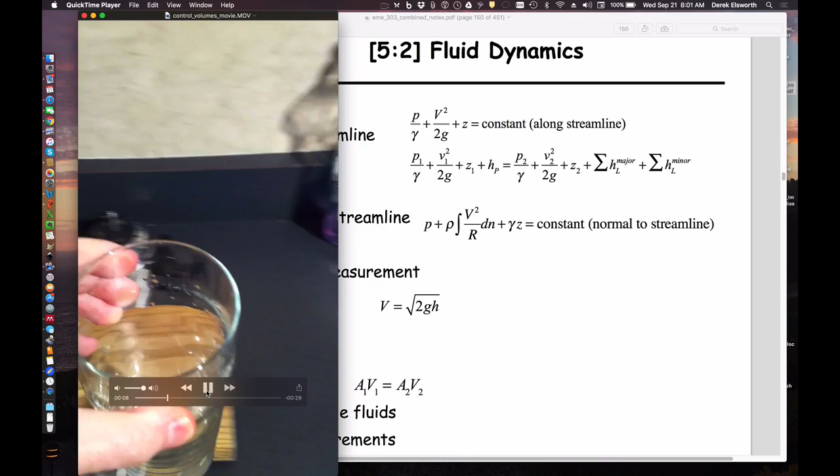So, anyway, that's all about Bernoulli. We'll also see this example in another circumstance. We'll use it when we talk about control volumes.

And again, you can see that this is kind of Bernoulli in action. I'll try and freeze it where I want to freeze it. Maybe it'll evolve. So obviously it's filling up the glass with water in this case.

But when we turn it on, if you look at this, it's an exposition of a couple of things in Bernoulli. One is that if we wanted to, we could write Bernoulli upstream and downstream. We could write the conditions that we know here, which we said last time would be fluid pressure, elevation, and velocity.

We'll have to talk about the exam later.

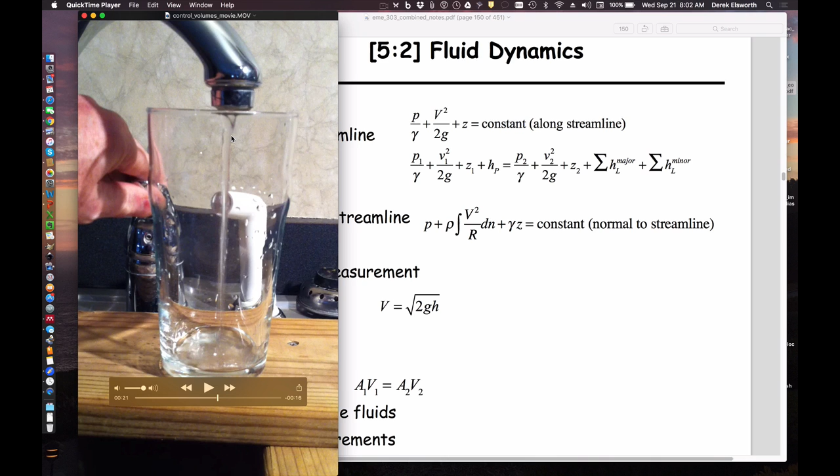And we could do the same at this lower portion. If we knew 3 of the conditions here and only 2 of the conditions here, such as pressure and elevation, we could calculate velocity. And if we wanted to deal with this, we could also apply this second requirement, which is in the background here.

Oops, wrong one. Which is in the background here. Let me find the right location. I didn't quite do that right, did I? Whoops.

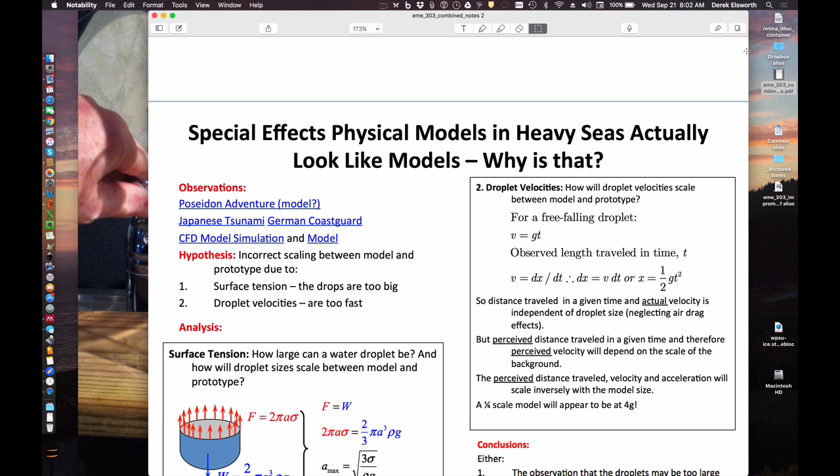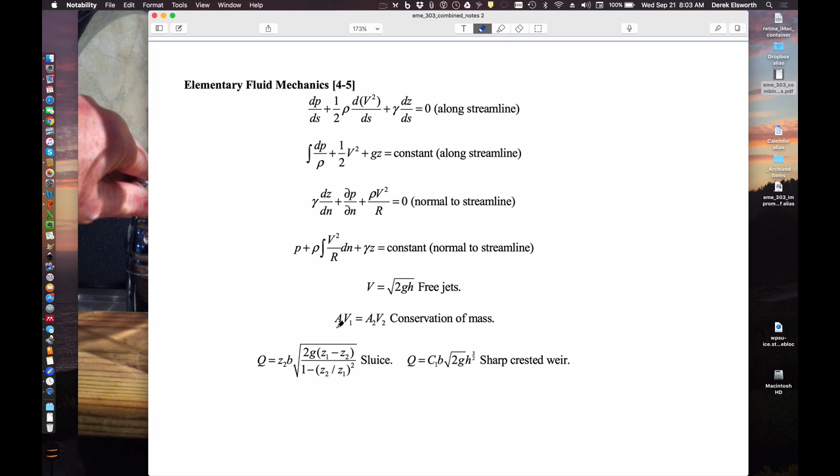And that is that we made the suggestion that when we use Bernoulli, what we can also do is apply this idea of conservation of mass, which is this term that we're dealing with here. And that is that the area times the velocity upstream and the area multiplied by the velocity downstream have to be equivalent to each other.

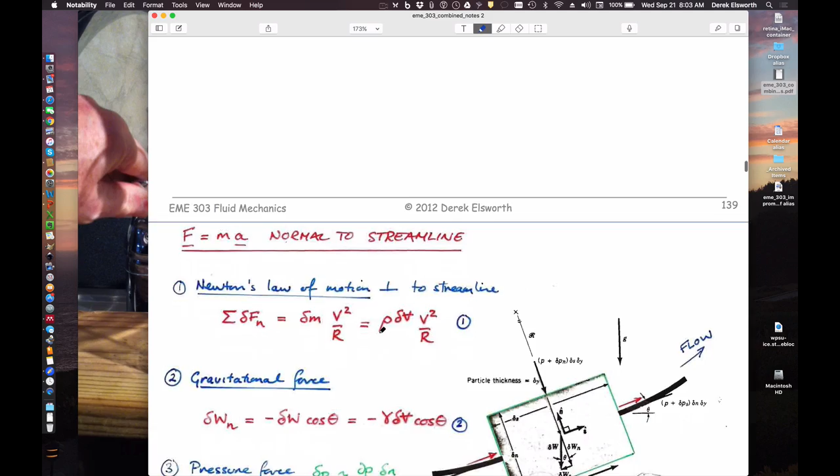And so I apologize for this, that we're going through this. I thought I'd set this up before, obviously I didn't. It's last time's.

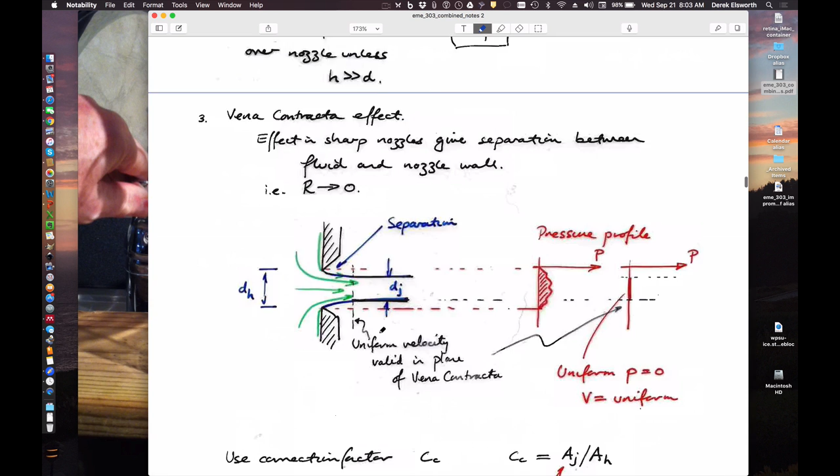This requirement here, you can see the exposition of it by looking at the cross-sectional areas here. You know that the velocity at the top has to be smaller than at the bottom. It could be 0 in the limit at the top, but because it's accelerating by gravity, it has to be faster at the bottom. And so if it's faster at the bottom, the velocities have to vary according to the ratio of the cross-sectional areas. We can see that exposed in this picture here.

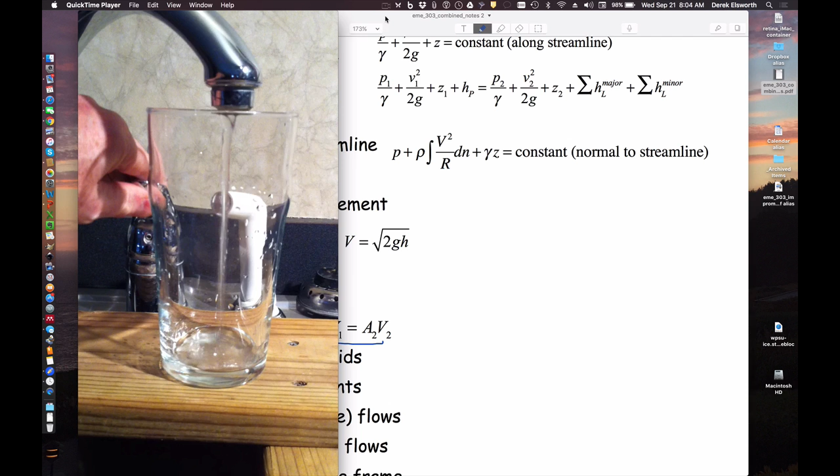And so that's what we'll talk about today, is we'll carry on dealing with Bernoulli, mainly along a streamline, and mainly applied to defining behaviors for a number of different examples, which we will attempt to look at. I'll go to this.

Okay, so to recap, most of our action is going to be on looking at Bernoulli along a streamline. If it's inviscid, then these terms all disappear to zero.

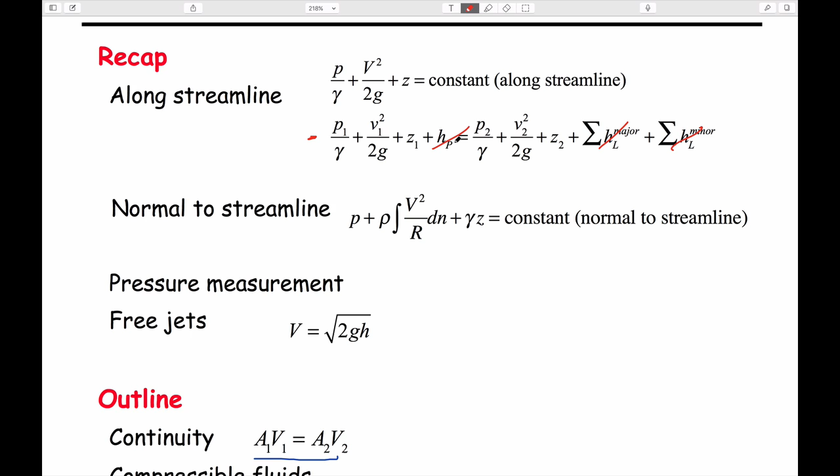And we're left with 6 terms. We can solve it with either one unknown or 2 unknowns. If we want to solve by 2 unknowns, then we have to invoke this to be able to solve it. We can also do it normal to a streamline.

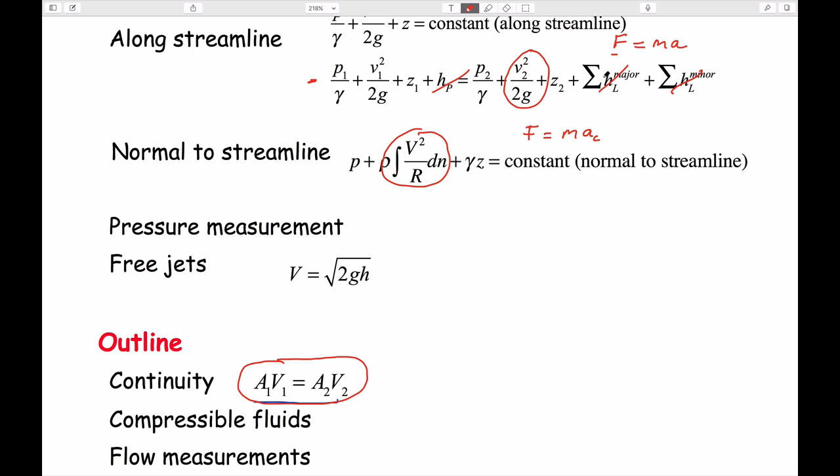Again, we have the same kinds of behavior in that if we look at this, it's not very well written for our uses, but we know that this is really an exposition of force equals mass times acceleration. This is the acceleration term. This is equal to force is equal to mass times angular centripetal acceleration. This is the acceleration term, and the other terms are those that relate to forces. And so they come from a common root, and really they are absolutely nothing different from looking at your dynamics class, your EMCH 212, that talks about motion of bodies governed by Newton's second law.

We did an example last time that looked at free jets, so we have a standard solution for that, which is this. And I was just going to spend some time looking at this example that we've just talked about now. And the example we talked about now could be the falls.

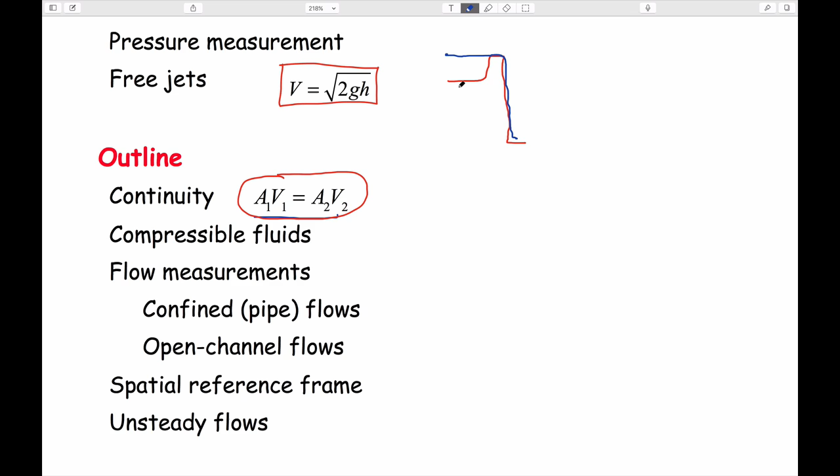And we can make the falls easy for ourselves by having a streamline that goes across here. You might have noticed in that movie that the kayak, as it's going down, look at it again, and you'll see that the kayak's going down at basically the same velocity as the droplets of water that are going down. They're in synchronization. And so it's really just an exposition of this F equals ma.

We could write the behavior of this between 2 locations, locations 1 and 2. We can make life easy for ourselves that instead of writing it here, where we would have some velocity that we'd have to include, we could use the big tank assumption and assume that the velocity is equal to 0 because the tank is large. And if that's the case, then we can write our expressions out as...

P1, pressure, head over unit weight, plus elevation, plus velocity squared term over 2g, is equal to the pressure at location 2, unit weight, plus z2, plus v2 squared over 2g.

And we could write this at 2 locations. We could write it where it's impacted the water at the bottom, at this point here, or we could write it at some location a small amount above that, and that would change the magnitude of our behavior.

If we do it at the bottom where the velocity is 0, v2 is 0, then pressure will be equal to a large number because we've absorbed the energy and the change of momentum of the water has converted into a pressure. Or if we take it just above the point where it impacts before it stagnates, the velocity will be its maximum because it's accelerating downwards, and the pressure will be 0 because it's acting against it.

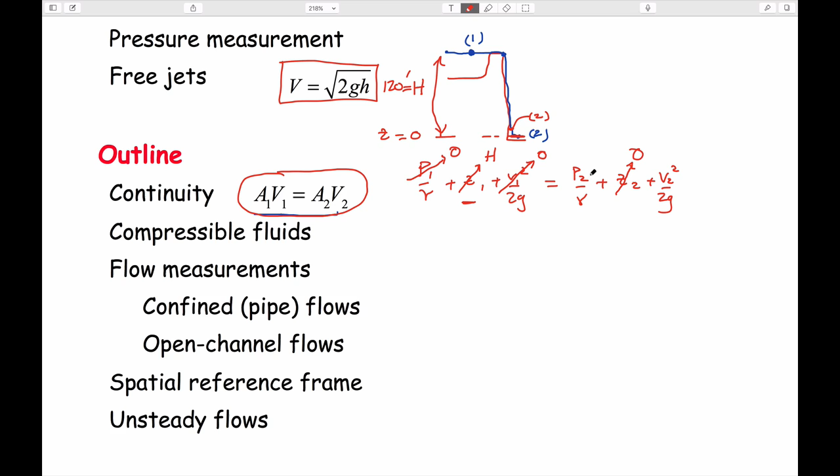If it's above the impact location where the velocity is finite, then pressure is equal to 0. So in this case, P is equal to 0. And in the lower case, V2 would be equal to 0.

And depending on what we want to calculate from it, then we choose either of those conditions. So I suppose in this case, if we wanted to calculate what the velocity is before it impacts, like in the free jet, then we choose this particular case. And we just get the fact that this would then be 0.

And so h is equal to v squared over 2g, v2 squared over 2g, which is the same as saying the velocity is equal to the square root of 2g times the height. So we would calculate the velocity of the water, same as the velocity of the kayaker at this particular location. And so we could do that quite straightforwardly.

The other thing we could do is imagine some falls that look different from the ones we have here. Instead of being vertically downwards, imagine the falls are a slope that comes down at some angle theta. We can do the same analysis again.

We can talk about a streamline, using the big tank assumption, and choose a location. Let's call it point 2, just to be consistent, before it impacts something. This is the case where the pressure is equal to 0.

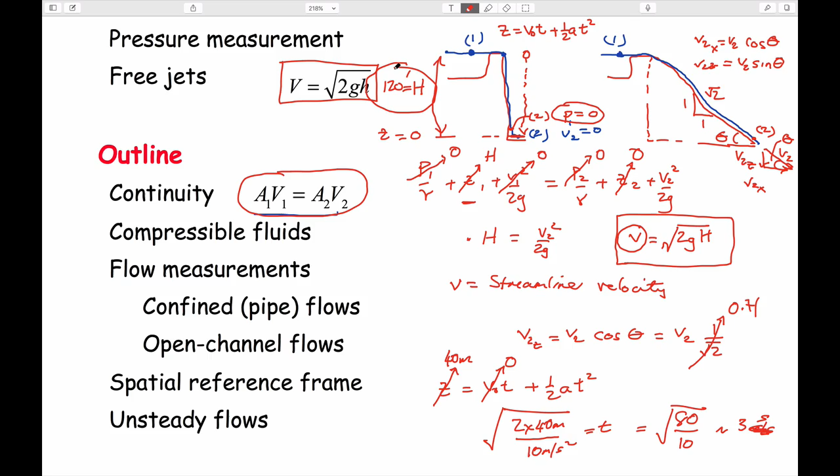So we know that when it's hitting at about 3 seconds, and if you remember in the dialogue or narration that came with it, about 3 seconds to hit the bottom, exactly the same. And you could calculate that from looking at Bernoulli's expression as well. So the point is we're really just dealing with bodies that happen to be in motion, which we can think of as individual particles of fluid, and they conform to F equals ma in all cases.

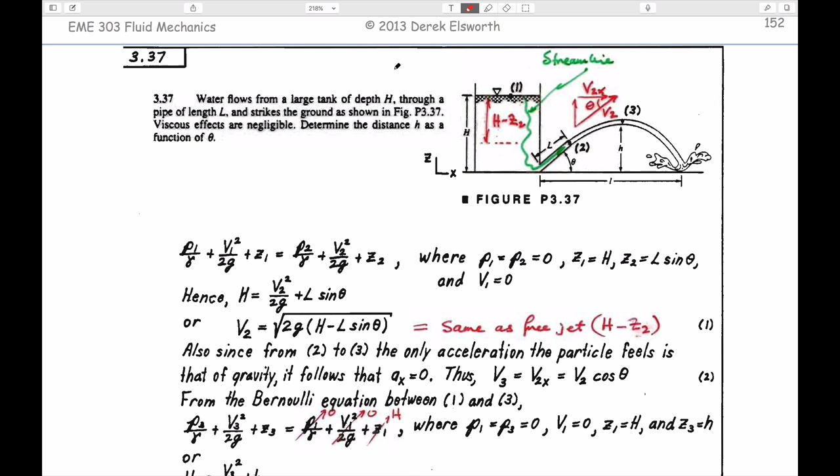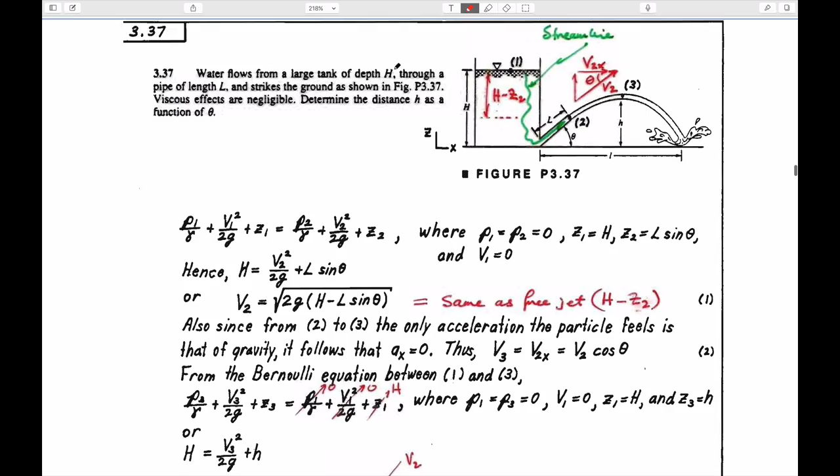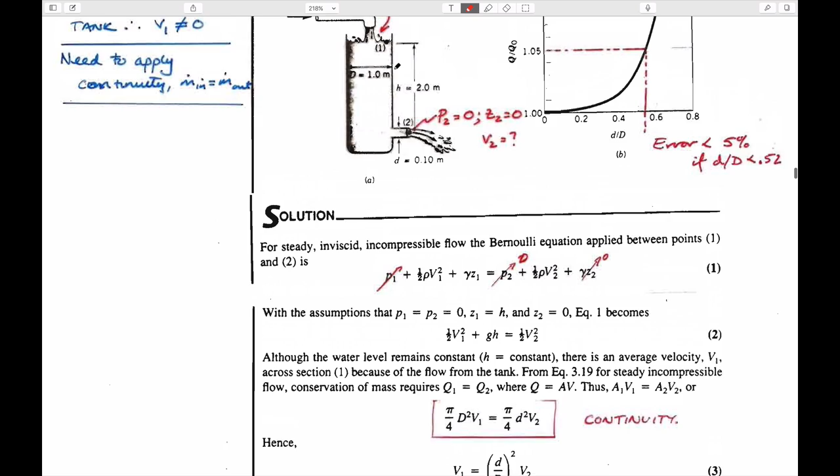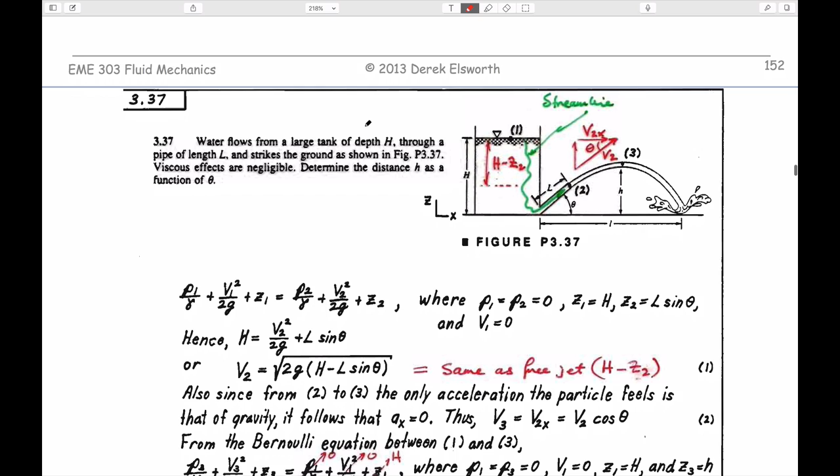So I plan to go through some examples just to make the point of how to solve these. There are 3 or 4 examples: one about fluids coming out of a tank, one about fluids hitting each other which we've already talked about, one about gas coming out of a closed container, and one where we don't necessarily require that the top surface velocity is equal to 0. So I thought we'd go through those and talk in general terms about how we might solve them.

So the idea here is that you have a tank, made a bit more overly complicated than it needs to be. You have a tank filled with water, with an outlet at the bottom that has a hose oriented at an angle theta up from the horizontal. The question is how high is the arc that develops as it flies out of here, and also how long is the arc as it goes from this location to where it comes down.

So how might we do that? We know we can write our conditions at a couple of locations. If we want to look at a streamline going through this green line, which is now a red line, it comes through here, we could write the behavior at this point.

Before we do that, let's back off. What happens if we had a hole in this tank here and a tube coming up to this level, open at the top? We know from fluid statics that the water elevation in this tube should rise to this point here.

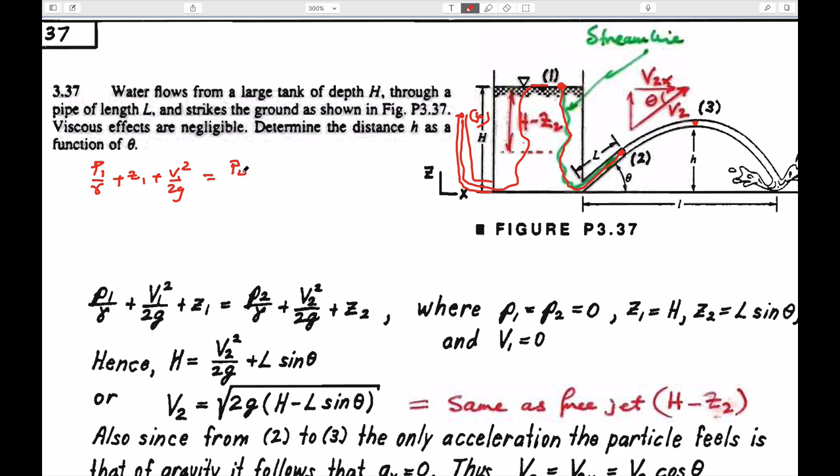If we wrote Bernoulli in terms of this, P4 over... well, let's not do that. We've said we always want to do it as a system from upstream to downstream. So upstream to downstream would be: P1 over unit weight plus Z1 plus V1 squared over 2g, and that has to be equal to the behavior here, which is the pressure at point 4, the elevation at point 4, and the velocity at point 4.

At the top of the tank, pressure is 0. Elevation of the top of the tank, if we take this as 0 here, then this would be uppercase H. The velocity at the top of the tank, by the big tank assumption, is 0. Pressure at point 4 is emanating into the atmosphere, and by the arguments from last time, horizontal pressure has to be 0, so the pressure at this point has to be 0 also, taking atmospheric pressure as 0. The elevation of this point, well this point here is equal to z by definition, so if z equals 0 is our datum, then plus z is this point here.

And this is what we don't know. So what we can do is rearrange this. The only terms we have are h minus z equals v4 squared over 2g. Rearranging that, we end up with velocity equals the square root of 2g times height minus the height of the tank minus the elevation of the point. So it's just a modification of our equation for a free jet.

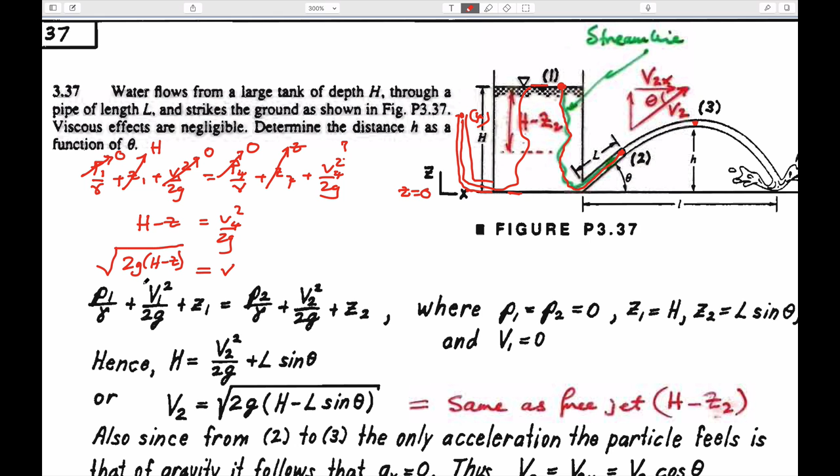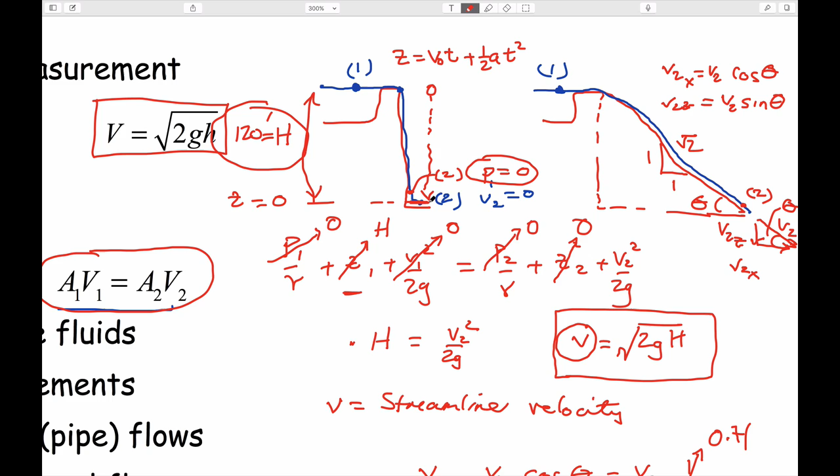In the same way that we did the example with flow going down this inclined plane, it's the streamline velocity we get. It doesn't matter if we're looking downwards or if it's deflected upwards, it's the direction in the streamline. In this particular case, the velocity along the streamline you'd expect would be vertically upwards.

If you move this tube up to this point here as we did before, the heads are equal to each other, and the velocity should be 0. Kind of makes sense from what we said.

But if the tube doesn't come up here and it squirts up to this point, just like the syringe example, then it should be at the top of its arc, and the velocity is also 0. When you think about this squirting out, really what we're doing is exchanging energy in different forms. Here we have potential energy. As we come down here it has kinetic energy, and it trades that kinetic energy as it goes up, again for potential energy at its highest location.

So we're just swapping between these forms of energy. This is kinetic energy, this is potential, and this is fluid pressure or strain energy within the system. We're just trading between those different components. That's how we can rationalize exactly what's going on here.

How do we figure out exactly what is happening at this point? First, we can solve this problem by writing this equation between points 1 and 2. That's exactly what you have here. We've already said what some of those values are.

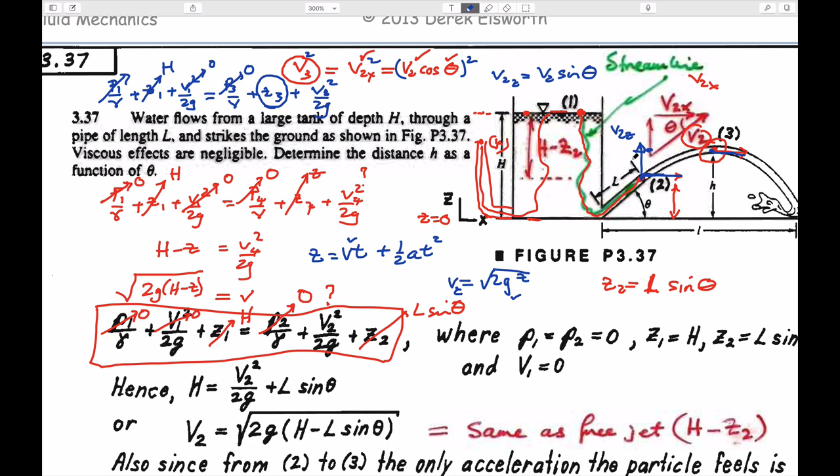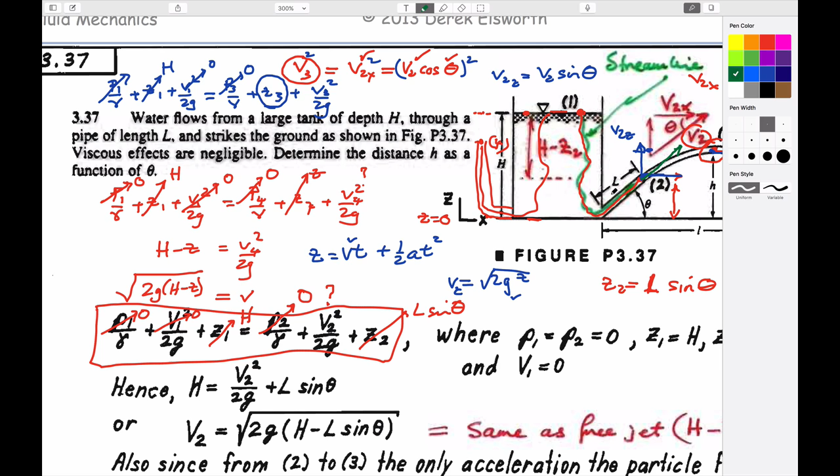It'll make a bit of a dog's breakfast out of that, but it'll be tangential to this arc, aligned, yeah, streamline. It's always a streamline velocity that we're dealing with. So it's made a bit more complicated by the fact that we have this tube coming out of it, but nonetheless, the key points are to be able to resolve directions.

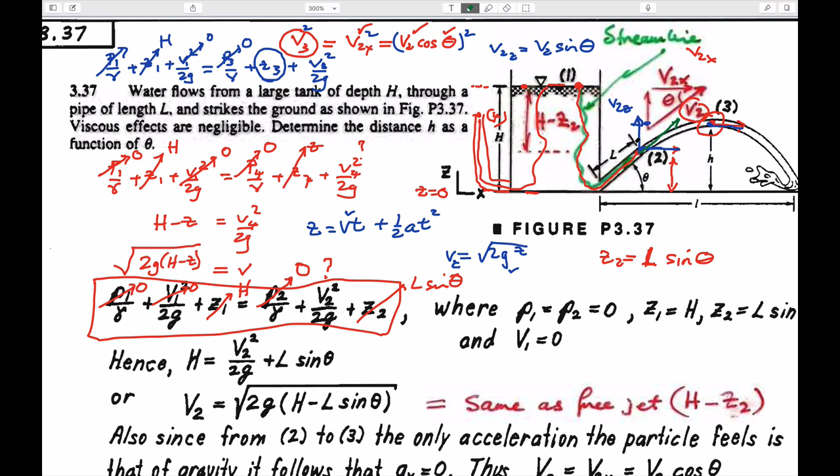Why did you say the pressure at point two is zero? Because it's coming out into the atmosphere. So the idea is that it's coming out of this. So the question is, why is the pressure zero, right? So you have a tube that looks like this.

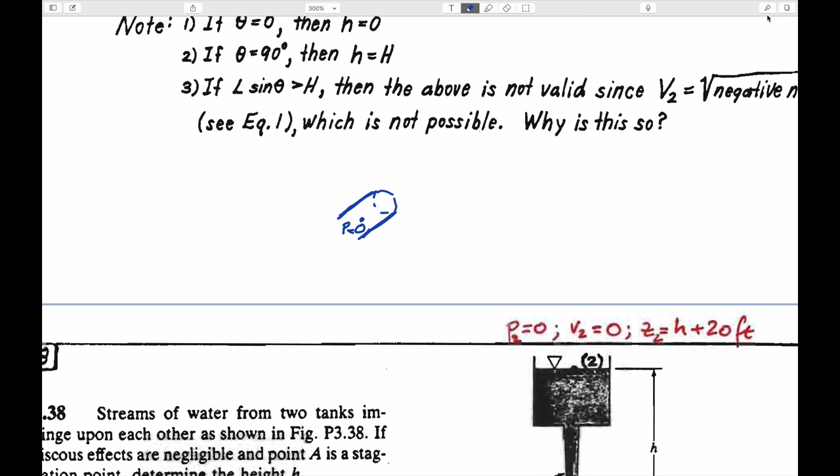And so clearly within here, the pressure is probably not zero because it's confined. But when it comes out as a jet into the air, then at this point here in the air it has to be atmospheric pressure. Atmospheric pressure has to act in the same direction in all directions. So this is P equals atmospheric. And so if it's acting at atmospheric pressure in this direction...

And it's also acting at atmospheric pressure in this direction, then for this to be continuous, if you do a free body diagram of a little packet of fluid, what's the pressure that has to be acting on a weightless fluid in this direction? It has to be zero. And so if the pressure in the center of this jet also has to be zero because it's acting against this sideways zero pressure, then it also has to be pressure zero in all directions. So that's the rationale.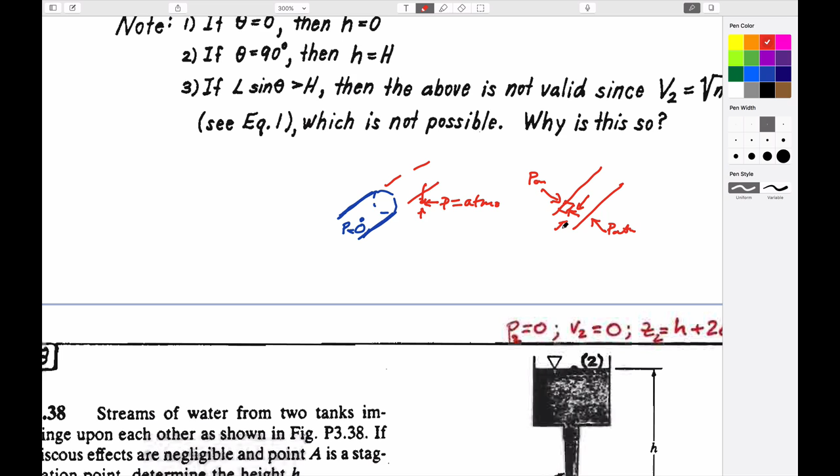And so it matters where you take this, because at this point it would not be equal to zero. And so I think germane to this discussion is this idea here, and that is that it really matters where you choose to take it.

We can take it before it impacts the pool at the bottom of the falls, in which case the pressure would be zero and the velocity would be non-zero. Or we can look at the stagnation point where the velocity is zero, and therefore the pressure probably is not zero. Because it's basically like imagine getting hit in the chest with a fire hose.

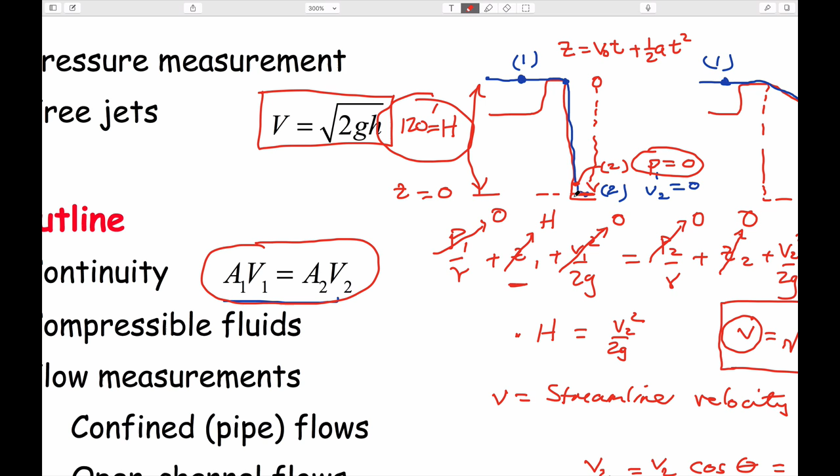Before it hits you in the chest, it really has zero pressure acting on it, because the fluid pressure acting in the atmosphere is zero on the side. But when you destroy the momentum of that, you feel it. So it's the destruction of momentum that we're feeling.

All right, second question, we'll go through.

So, two tanks. One tank, which is pressurized, has fluid squirting out of it, hits a jet that's coming from a second tank. They meet. The two jets, like two cars colliding. When two cars collide at 30 miles an hour, if they're the same mass, they stop dead, right? Because they exchange momentum completely. And so that's exactly what's happening here.

There's a streamline that's coming out of this jet here, which is ending up at point A. And there's a separate streamline which is coming from point 2 and ending up at A. There is not a streamline that comes out of 1 and ends up at 2, because it's not a streamline, right? One is coming down here and squirting sideways, and the other one is going up here and squirting sideways. So they're two separate systems. So you cannot write Bernoulli's equation between 1 and 2.

But you can write it between points 1 and A. So P1 over gamma plus Z1 plus V1 squared over 2G is equal to PA over unit weight plus ZA plus VA squared over 2G.

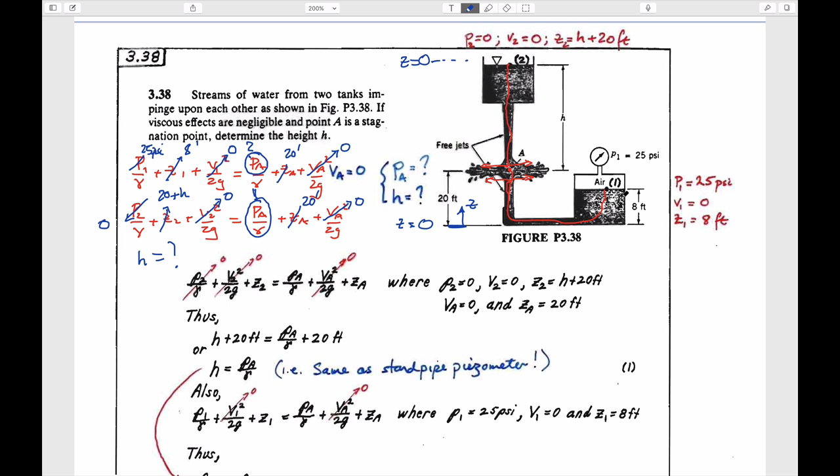Always choose a datum. Our z is always vertically upwards, positive upwards. And it doesn't matter where we took the datum. If we chose our datum to be z equals 0 here, then this would just be minus h. This would be minus h plus 20. And this would be minus h minus 20 plus 8. So just do your accounting.

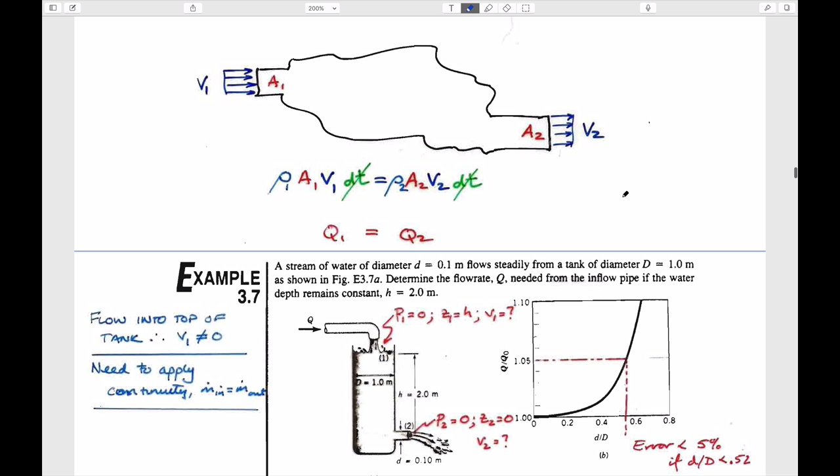Yeah, and there's some comments in there as well. We've talked about this, about the fact that if we use Bernoulli's equation, sometimes we only have 4 known variables out of the 6, and we need to make some assumptions to be able to close the system.

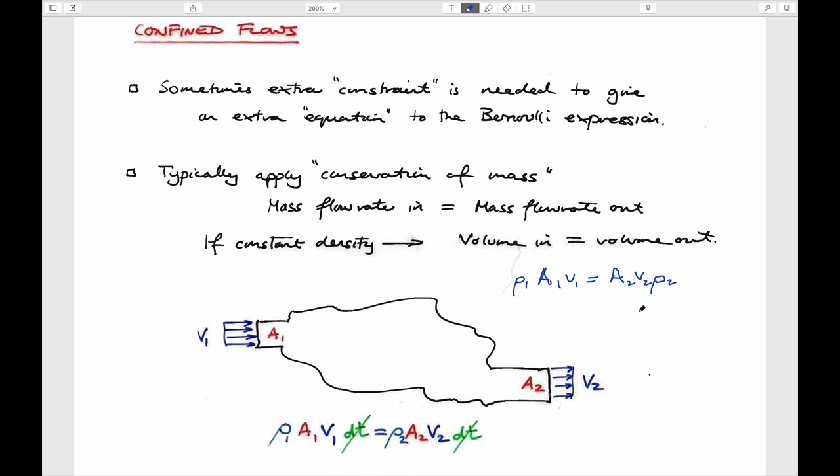The easiest way to do it is to write that the cross-sectional area of flow upstream and the velocity are equal to the cross-sectional area of flow and the velocity downstream. It's not quite true - we should also multiply this by the density upstream and by the density downstream. Usually the densities are the same, but what we conserve really is not flow volumes, but flow masses, mass rates and flows. We didn't do this last time, but strictly speaking, when we talk in weeks 6, 7, and 8 about conservation equations, we'll always work on conservation of mass, conservation of momentum, and conservation of energy. Conservation of momentum, well, conservation of mass requires this requirement.

Maybe a bit more of a detail for now, but one that we perhaps can mention.

We've taken a kind of an easy route in most of the calculations we've done, in that we've always made this big assumption of the big reservoir. And that doesn't always have to be the case. If that's not the case, then we need to invoke something like this expression above: that the mass flow rates are equal upstream and downstream. If it's an incompressible fluid, then usually rho 1 and rho 2 are the same, and really it just becomes A1 V1 equals A2 V2. So that's usually the case, but not always.

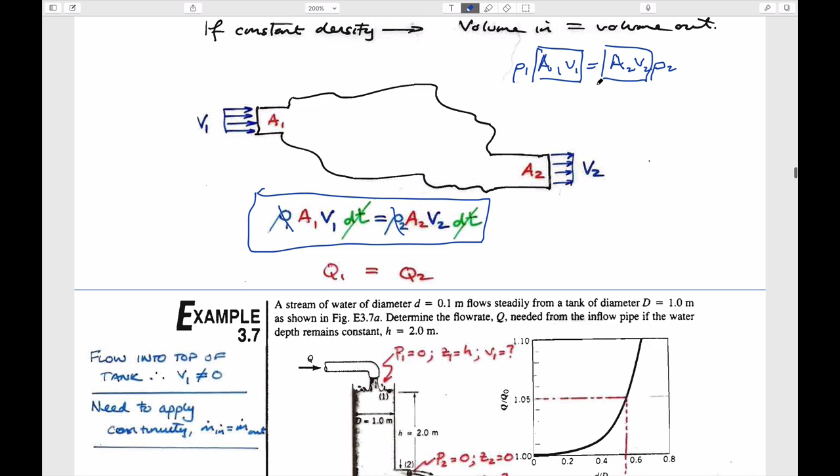So one exposition of this is this example. Instead of assuming the big tank relationship, where the velocity here is 0 because of the big tank, and therefore the tank level is not dropping as a function of time as we pour stuff out the bottom - if you imagine shrinking this tank diameter smaller and smaller, that becomes a more difficult requirement to adjust for. We know that Bernoulli has to be steady state, so the only way we can keep this as steady state, so it looks the same at time 0 as at 10 seconds and 100 seconds, is that we have to keep on filling it up with water by a spigot to keep it at this elevation.

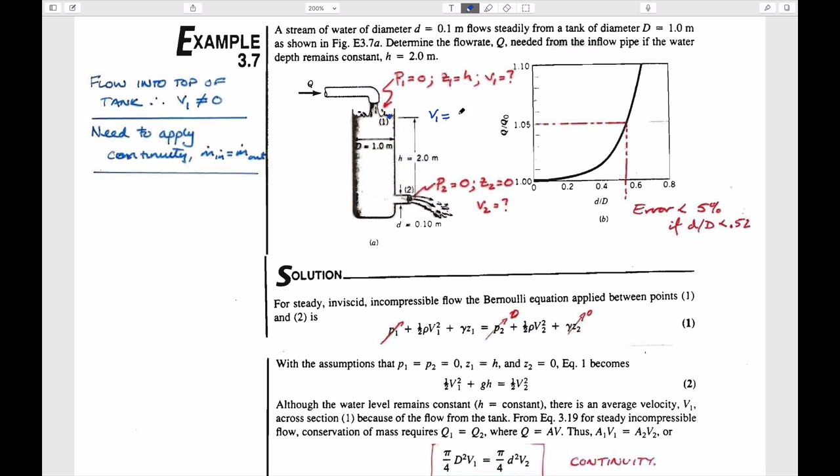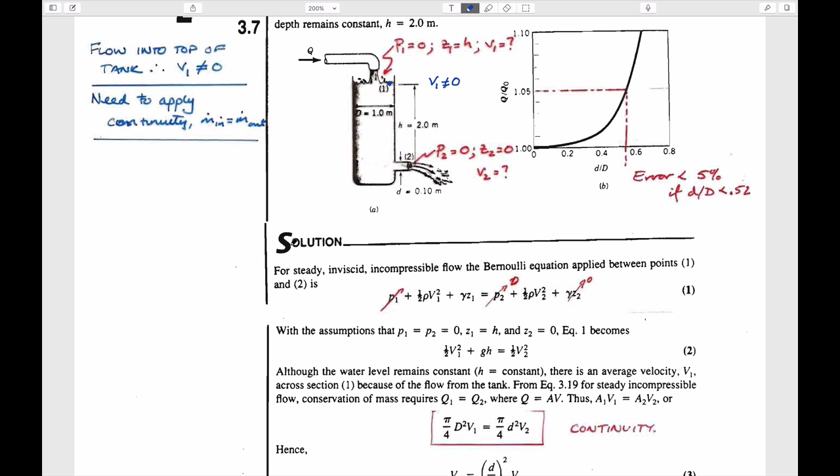But we can solve this problem merely by allowing the fact that the velocity at 1 doesn't necessarily have to be equal to 0. So what we can do, and I'll walk through this without going into complete detail, is write Bernoulli's expression slightly differently from our form here, but it's basically the same expression we're dealing with.

The upstream conditions are what? We're on the surface, so by definition the pressure here has to be 0. It's a steady state problem, so the elevation of that water surface has to be equal to h, which is z1. We're not going to constrain it by making sure velocity 1 is equal to 0 - we're going to allow it to be non-zero. That's allowed by the fact that we're pouring fluid in here. By definition, if we're pouring fluid in here, and we smear this fluid across the whole width of the tank, then the tank velocity has to be non-zero, given by whatever the rate in here is.

We can write the downstream velocity behavior in terms of the fluid pressure it comes out at, which is 0 for the arguments we've already made. We know the elevation, if we take the datum here as z equals 0, then this is also equal to 0. And the velocity we don't know.

What we do know is the conditions, 4 of the 6 conditions, which are the ones circled, but the ones we don't know are these. And if you look at the equation below, you see that's all substituted. The things we don't know in Bernoulli's equation are these 2 unknowns, but we can equate them.

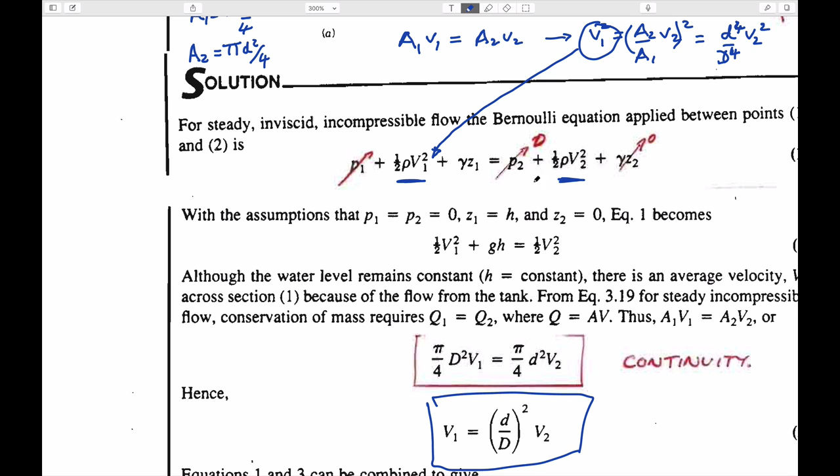If we make that substitution and do the math, we end up with this bottom equation, which says, if we want to write it out, velocity at point 2 is equal to the square root of 2gh multiplied by 1 over 1 minus d over D to the 4th, also under the square root.

So this just says there's the equation of a free jet, which is this first part, the velocity we'd expect if we assume the velocity on the top surface of this container is equal to 0. That's what this term is here. But if we allow for the fact that this velocity is able to go down at some velocity v1, which we can calculate...

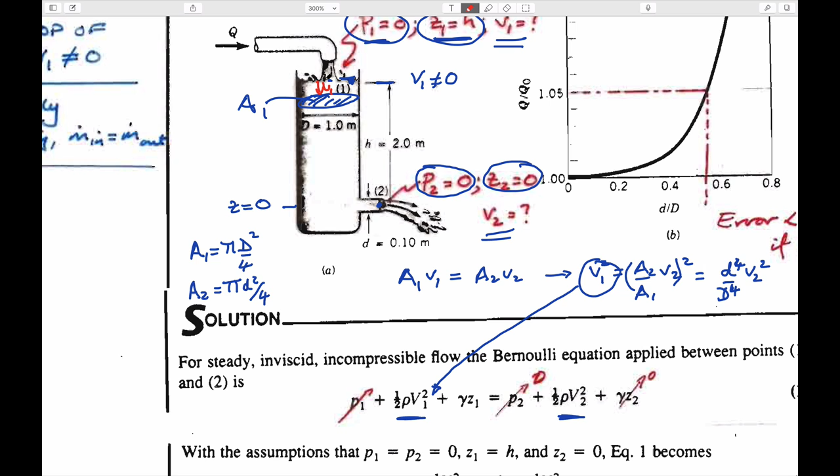...then as a result there's a correction factor, which means the flow rate is always going to be reduced. If the tank is really huge, uppercase D is very large, and this term on the bottom is just equal to 1, square root 1 over 1 is 1, and there's no change. As the magnitude of D becomes close to d, it becomes undefined, because it's 1 minus 1, which is 0, and square root infinity is not a very useful number.

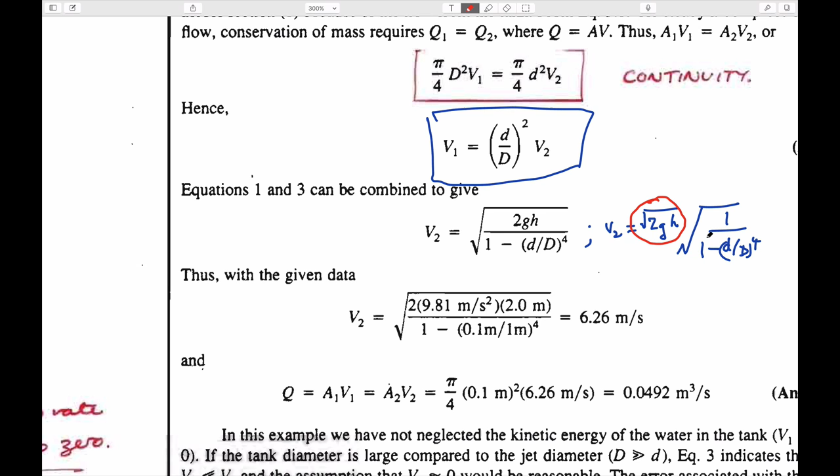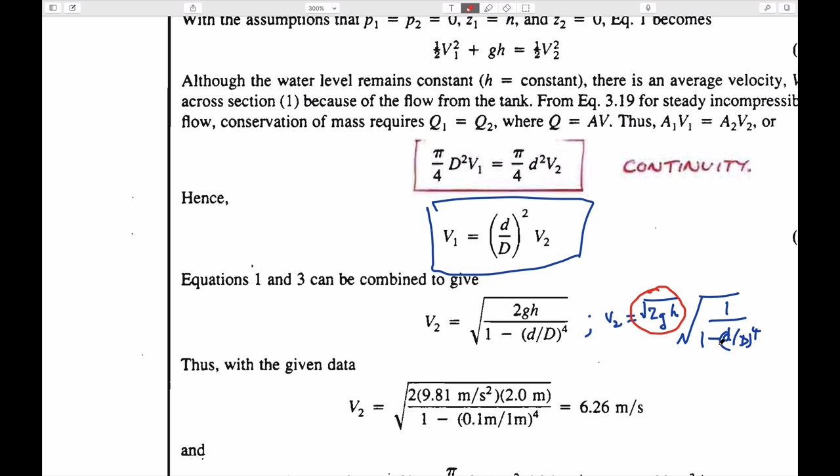So it becomes, or square root 1 over infinity, a much smaller... which way does it go? When it's equal to a large tank, there's no effect. When it's equal to a small tank, it reduces it, and it doesn't make sense when it's less than 1, because the diameter of the tank is less than the pipe. So D has to be slightly larger than lowercase d.

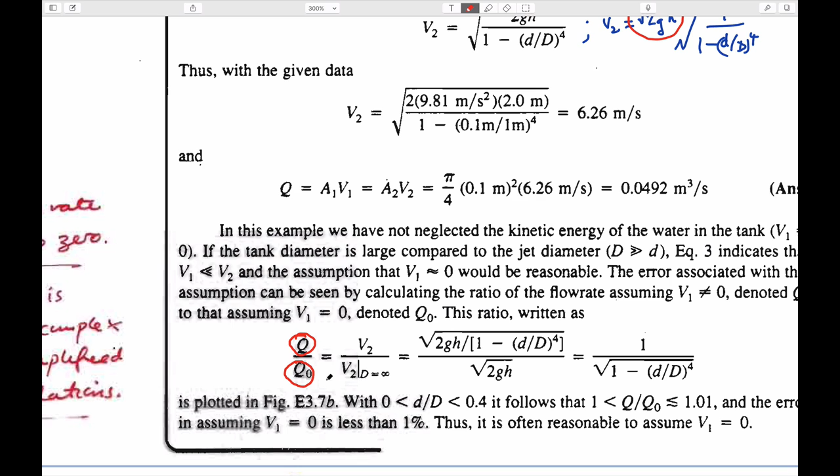So if we wanted to look at the ratios of the flow rates between the free jet behavior and the behavior when we have the non-zero velocity, actually the other way around, this is the one on the bottom, which is the free jet, and the effect when it's non-free jet, we can plot those results, and we get this result here.

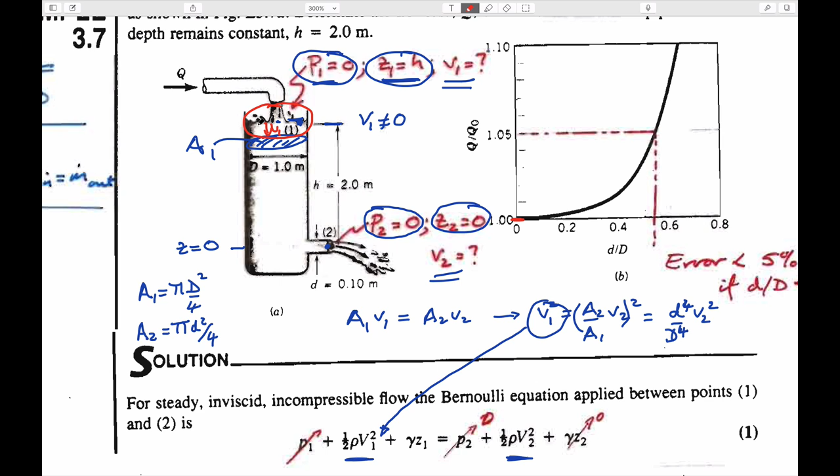Which says the magnitude of this is equal to 1, there's no effect of this velocity at the surface, except when there's about a 5% effect when the diameter of the tank is less than maybe twice the diameter of the outlet pipe. If it's less than that, there's less than 5% difference, hence our justification for using this large reservoir volume expression, which allows us to take velocity 1 as equal to 0.

Okay, we won't get to the final one, don't need to, we'll talk about it later on as a decapitated gas cylinder. That's it for today.